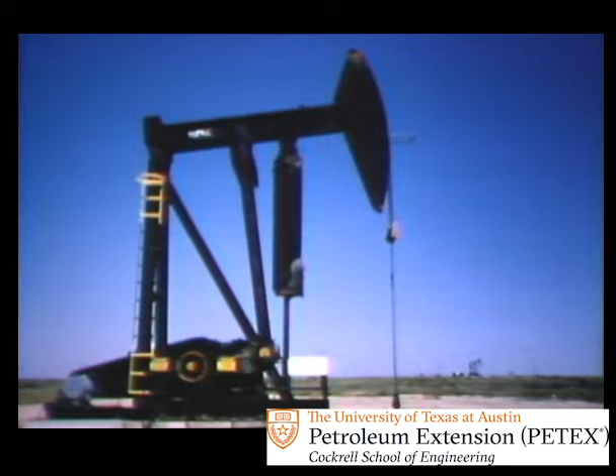The oil produced from this wellhead first travels to this treating facility, and then to this tank, where it's gathered and stored for shipment in the pipeline. But before the oil is ready for pipeline shipment, it must be tested for quality and measured for quantity. This testing and measuring process is the job of the gauger.

Although there are many steps in the gauger's routine, he has two goals to accomplish while working a lease tank. The first goal is to determine how much sediment and water, or S&W, is in the tank oil. S&W is very undesirable to have in oil, primarily because it is not a marketable product. Most leases produce at least some S&W, so the percentage of S&W contained in the tank oil is of vital importance to the lease company, the pipeline company, and hence the gauger.

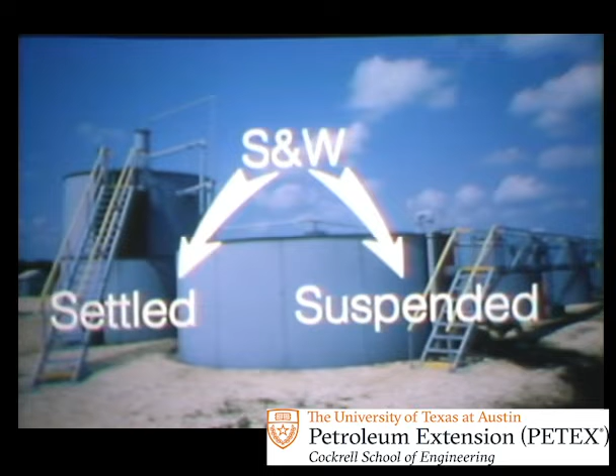We'll be talking a lot about S&W in this program, but for right now, all you need to know is what S&W stands for, and that there are two types of S&W: settled and suspended. Settled S&W forms a layer on the bottom of the tank and is often referred to as tank bottom. Suspended S&W remains trapped in the bulk of the tank oil and can only be seen after being chemically or physically separated from the oil.

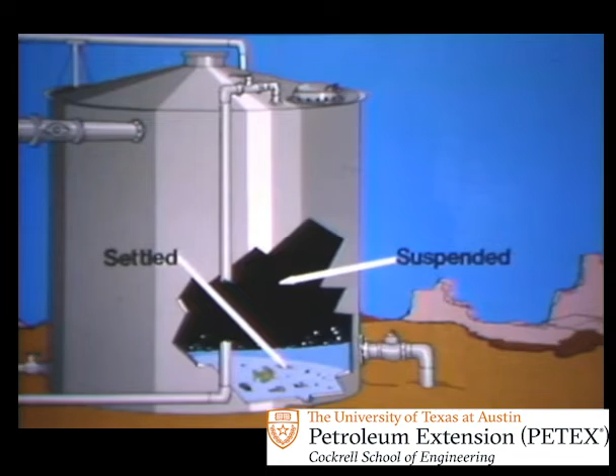The second major goal of the gauger is precise measurement of volume. He measures how much fluid is stored in the tank, transfers or runs almost all the tank into the pipeline, and then measures the remaining fluid in the tank.

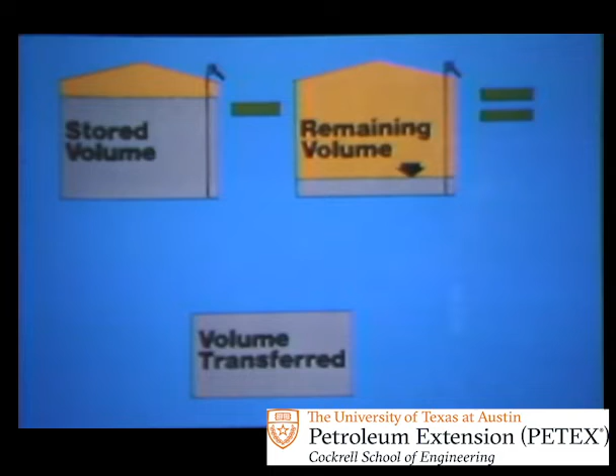So let's take a look at the tools a gauger uses to test and run a tank. And to start, specifically those used to determine the S&W content.

One of the first tools a gauger needs for S&W testing is a sampling device like this core thief. Most core thieves are the trap type, which means they have a rotating valve at the bottom that acts like a trap door.

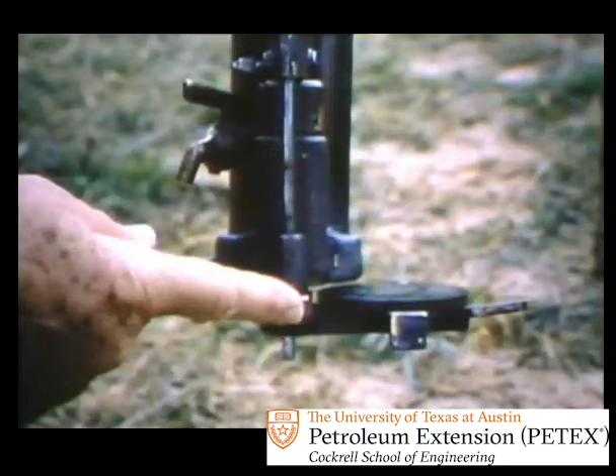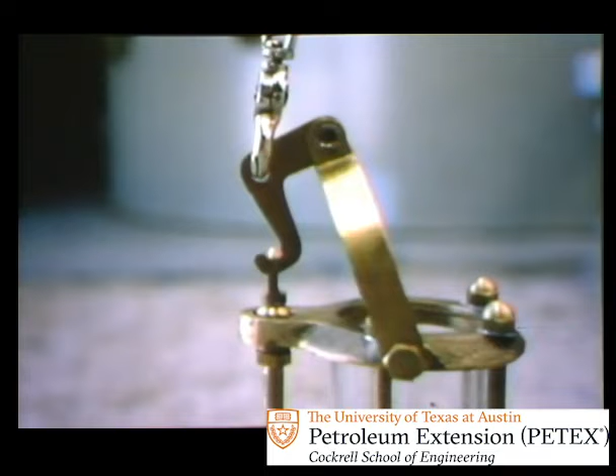First, open the rotating valve. This makes the thief a hollow tube that passes through the oil with a minimum of disturbance. The rotating valve can be closed at any depth in the oil by means of a trip release attached to the thief line. Once the thief is lowered to the correct depth, a sharp tug on the line will trip the valve closed. The thief is then retrieved with the oil sample enclosed.

Or, for tank bottom samples, the gauger can extend the trip rod on the bottom of the thief. When the trip rod bumps the tank bottom, the rotating valve closes.

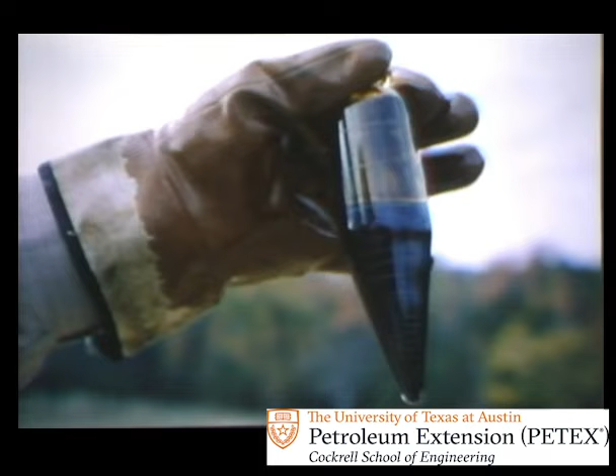Once all the oil samples are retrieved, the gauger will eventually put a small representative portion of the tank oil in a centrifuge tube for testing.

Centrifuge tubes are used to run the oil samples in a centrifuge. Tubes come in a variety of forms. There are 100 milliliter tubes, 200-part tubes, as well as 12.5 milliliter tubes and pear-shaped tubes. Regardless which is used, the tube should be clean and free of dirt and water.

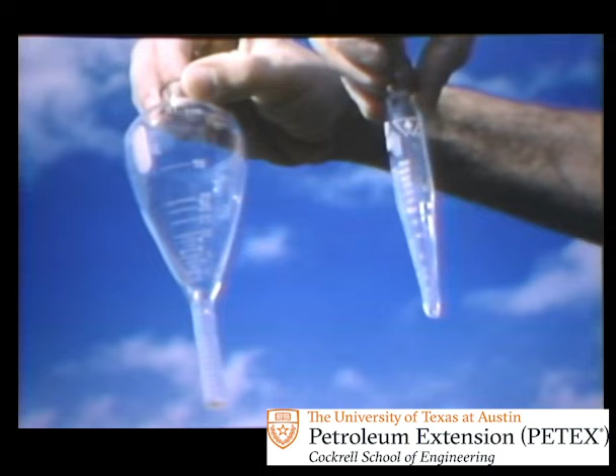The gauger dilutes the oil sample with solvent before it's tested. The solvent must be clean and water-saturated according to the API Manual of Petroleum Measurement Standards, Chapter 10, Section 4.

After dilution, the tube is placed in a preheating unit or the centrifuge preheater for warming, and a pocket thermometer verifies the sample has reached the proper test temperature.

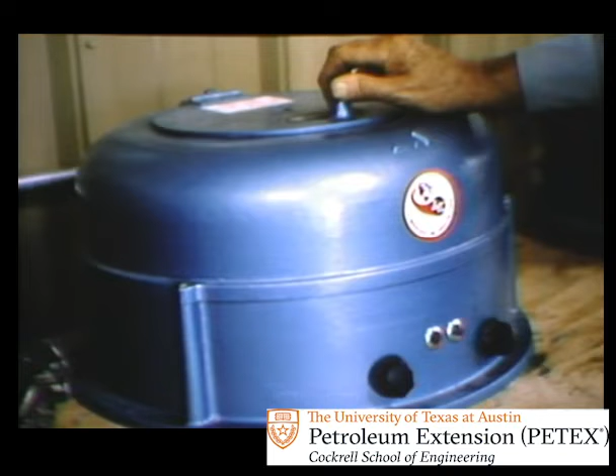Once the samples are heated, they're placed in the centrifuge. The suspended S&W in the oil is separated from the oil by applying centrifugal force. Since S&W is heavier than oil, any suspended S&W in the oil sample will be forced down to the tip of the tube.

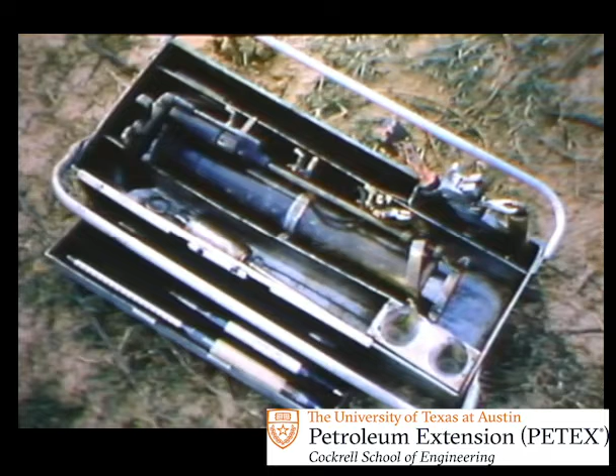Now let's look at the tools the gauger uses to measure volume. To start, he first determines the API gravity of the stored petroleum by using a hydrometer. Check the hydrometer for defects such as detached API gravity scales, mercury column separation in the thermometer, and loose shot in the tip.

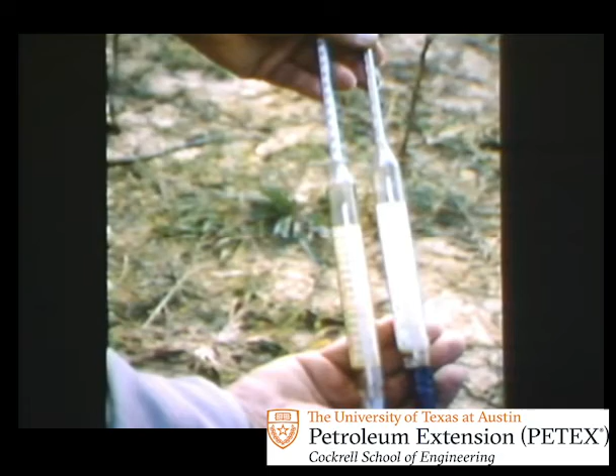Since temperature affects the volume of the stored petroleum, the gauger also needs a clean, approved cup case thermometer to lower into the tank oil.

To measure the depth of the oil stored in the tank, the gauger uses a flexible steel measuring tape graduated every 1/8 inch and fitted with a brass bob. The tape must be clean so the oil will leave a clean cut or mark on the tape for easy reading.

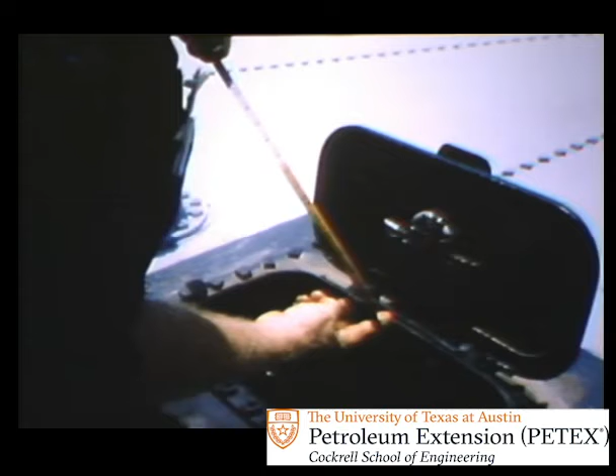In addition, the gauger carries a small notepad and pencil to notate his measurements and a rag to clean his hands and oil spillage.

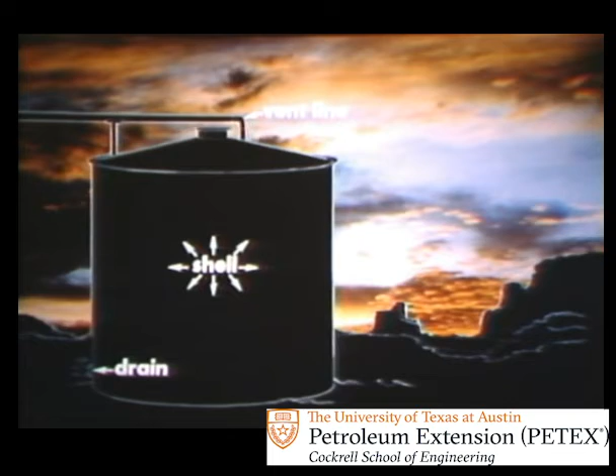Now that we've looked at the basic tools, let's look at the tank. The typical lease tank consists of a metal shell with a vent and drain, an inlet line to allow oil from the treating facility to flow into the tank for storage, a hatch through which the gauger measures and samples the oil, a pipeline connection or tank outlet line at the bottom of the tank, and often an equalizer line that connects and equalizes the liquid level of all the connected tanks in the battery.

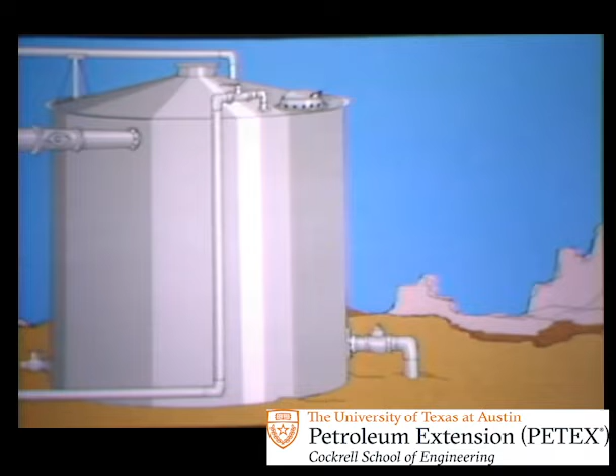Now that we've oriented ourselves to what we're going to be working on and with, let's walk through the gauging, testing, and running process step by step.

When you first arrive at the tank site, take time to inspect the general condition of the tank. Make note of any distortions, leaky seams, or connections. If there are any questionable conditions, play it safe. A gauger spends a lot of time alone, and it may be a long time before someone wanders by if you are injured.

As you walk around the tank, check that all bottom connected valves are closed, and that the tank outlet connection has remained closed and sealed since the last tank run. A seal is used for security purposes and is attached to the valve in such a way that any valve movement will break it. The seal itself is usually a numbered boxcar snap type seal, a numbered lead seal with a wire dart, or occasionally a padlock and chain.

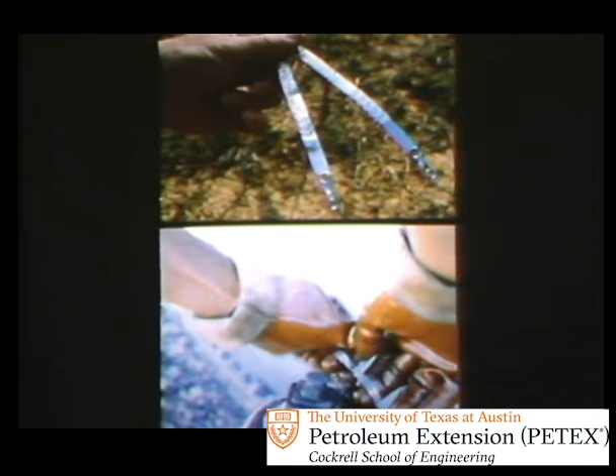Once the bottom valves are closed, write down the tank identification number and the maximum fill level, both of which are stenciled right on the side of the tank. Note the height of the outlet connection and of the equalizer line if one is in use.

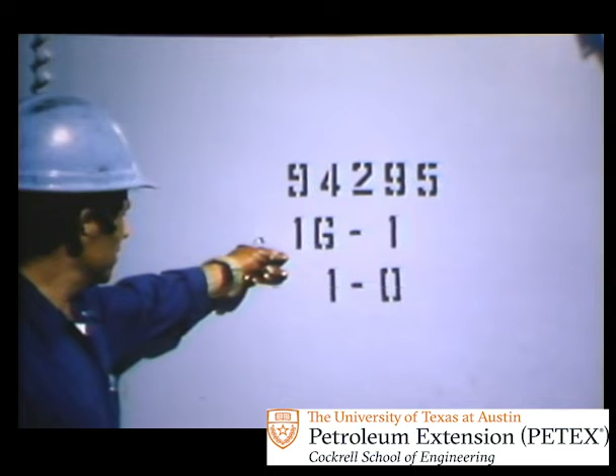Put all the tools in a carry case to save time, and before leaving the truck, switch on the centrifuge heater or preheating unit so it can be warming while you perform your other duties.

As you climb the tank steps, be sure to hold the handrail. This prevents falling on water or oil slick treads and bleeds off any static electricity which might ignite tank vapors when the hatch is opened.

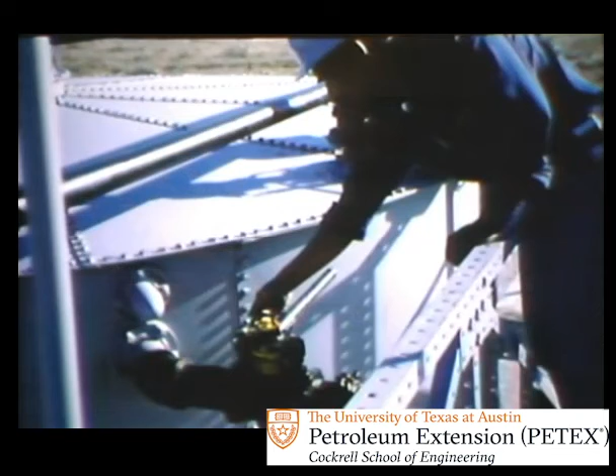Once on top of the tank, verify all top valves are closed, including the valve on the equalizer line. Once all the valves leading to and from the tank are closed, the tank is isolated and ready to work.

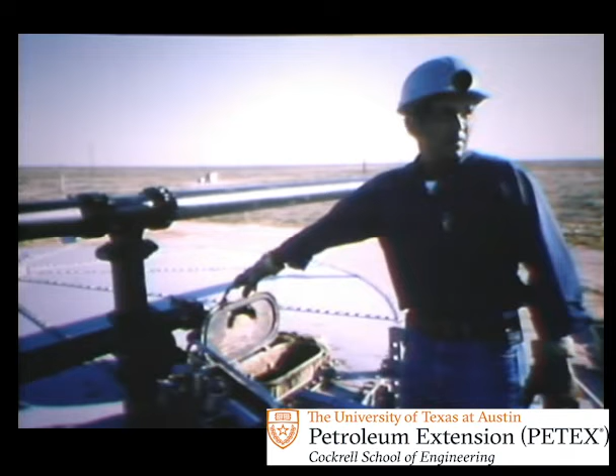If the tank contains sour crude, be sure you wear all the proper breathing equipment or take the necessary precautions. Place your body upwind and turn your face away as you open the hatch.

Next, look at the oil surface. If it's boiling or agitated, the chances are that the tank was recently filled or rolled. Do not work a tank in this condition. Agitated oil stirs up the settled S&W, giving inaccurate test results. Wait until the tank settles and the surface is still before working the tank.

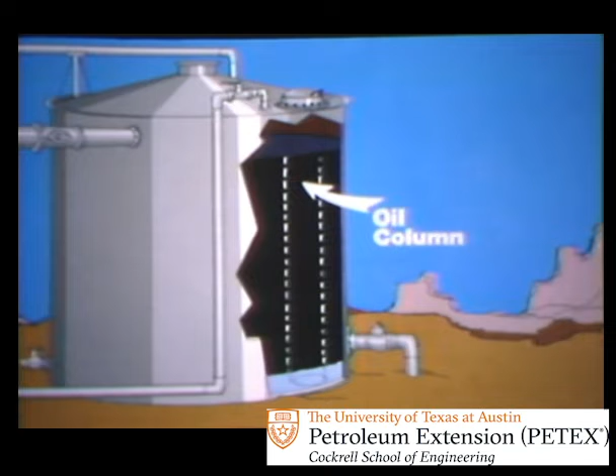Notice that the size of the hatch restricts access to only a small portion of the stored oil. The gauger is limited to working with a small column of oil. For this reason, the oil samples must be taken in a specific order, starting at the top of the oil column and working down. Otherwise, the movement of the thief stirs the settled S&W, contaminates the upper oil samples, and gives inaccurate test results.

First, take the oil thief and set the rotating valve to the open position and attach the trip. Lower the thief to the desired level, trip the rotating valve, and withdraw the thief from the tank.

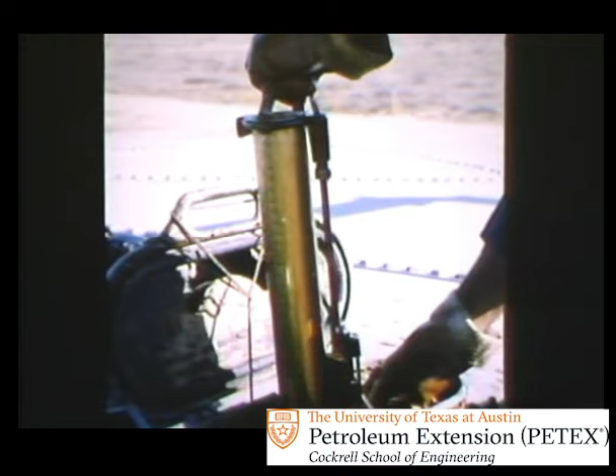According to the API Manual of Petroleum Measurement Standards, the level, as well as the number of samples, varies with the size of the tank. For tanks holding 1,000 barrels or less, only one sample is needed. Draw the sample midway between the surface of the oil and the bottom of the outlet connection.

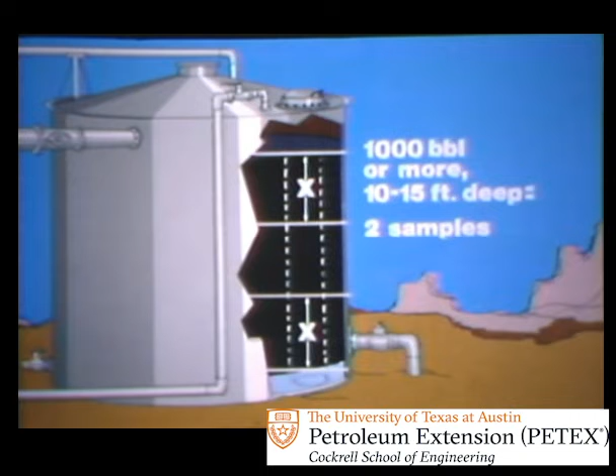For tanks holding 1,000 barrels or more, and having a depth of between 10 and 15 feet, a two-way sample is required. The upper sample is drawn at midpoint in the upper third of the tank content, and the lower sample is drawn at midpoint in the lower third of the tank content.

For tanks holding 1,000 barrels or more, and having a depth of 15 feet or more, a three-way sample is required. The top sample is taken with the top of the thief 6 inches below the surface of the oil. The middle sample is drawn at the tank contents midpoint, and the outlet sample is taken with the bottom of the thief level with the bottom of the outlet connection.

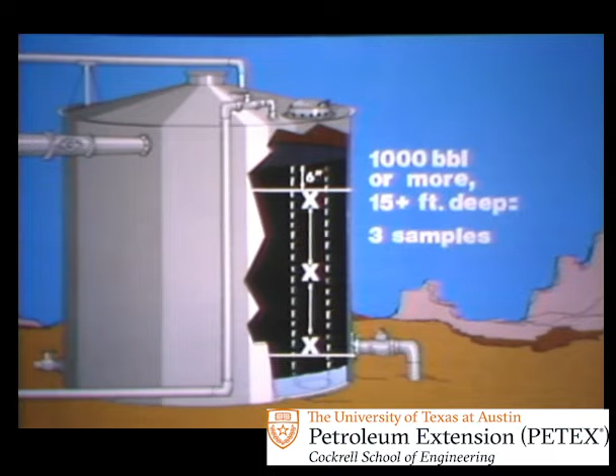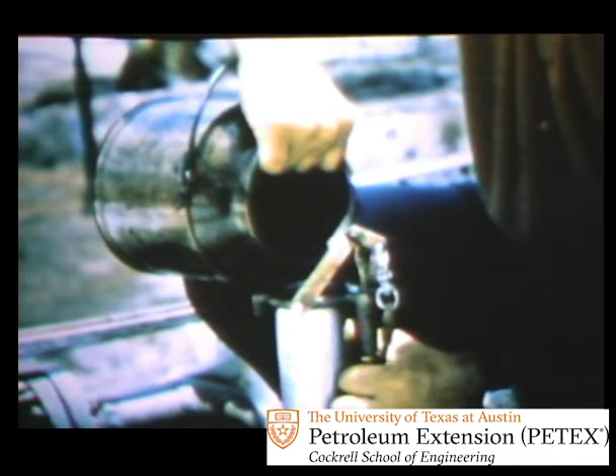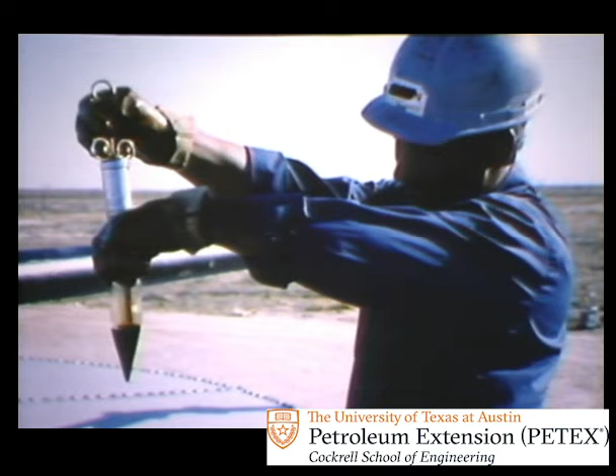As the samples are drawn in the proper order, the gauger may handle them in different ways, depending on company policy. One way is to collect all the samples in a sample container, mix the contents, then draw off a representative portion for testing. A second way is to draw off a small amount of each sample with a metal syringe and place it directly in the centrifuge tube until it is half full with samples of tank oil.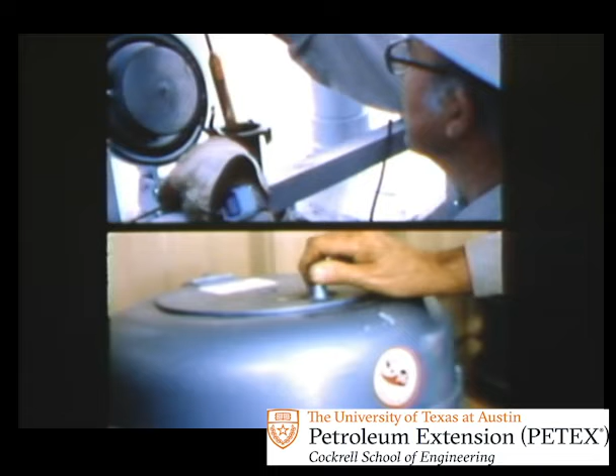Regardless of which method is used, a representative portion of tank oil must be used for both the hydrometer test and the centrifuge test.

Fill the thief with oil representative of the entire tank and place it in a vertical position. Then insert the hydrometer so that it floats freely throughout the hydrometer test. For high viscosity oils, a slight spin of the hydrometer will help bring it to rest.

Look at the oil surface around the hydrometer. If bubbles form, remove them with a piece of paper so they won't affect your reading.

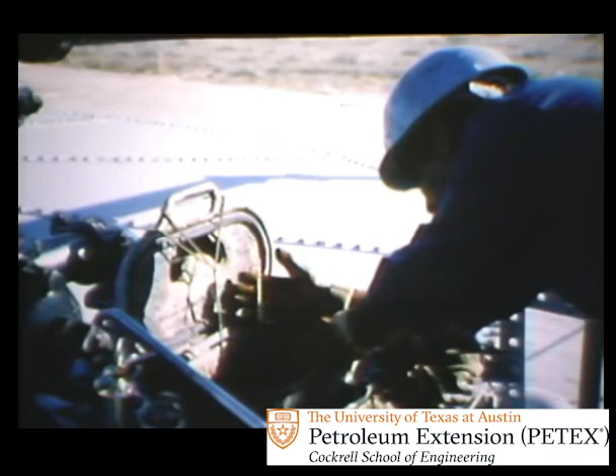Depress the free-floating hydrometer just 2 scale divisions and release. Do not depress more than 2 divisions, or the weight of the oil on the hydrometer stem will affect the reading. The hydrometer should immediately return to its previous position. If it doesn't, the oil is too thick to test and usually needs to be heated.

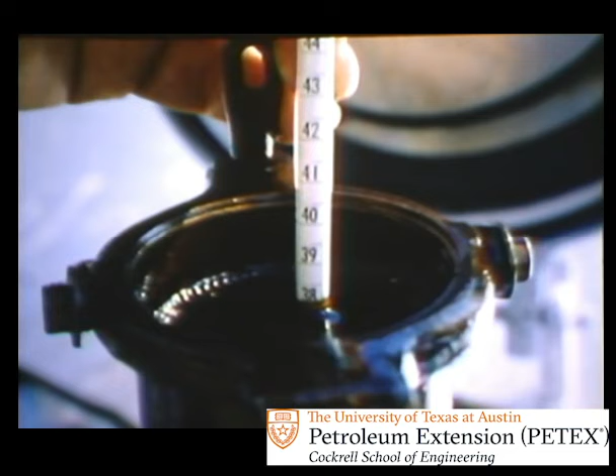The API Manual of Petroleum Measurement Standards, Chapter 9, Section 1, has a table listing limiting conditions and test temperatures for a variety of crude sample types.

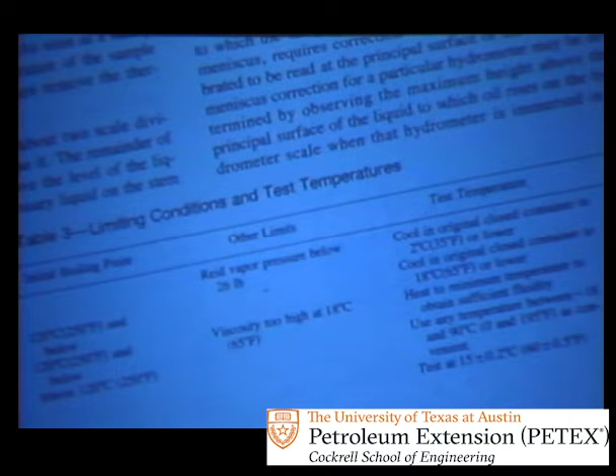Allow sufficient time for the hydrometer to come to rest, usually about 5 minutes, and for all the air bubbles to come to the surface. While you're waiting on the hydrometer, you can position the cup case thermometer for the tank oil temperature reading.

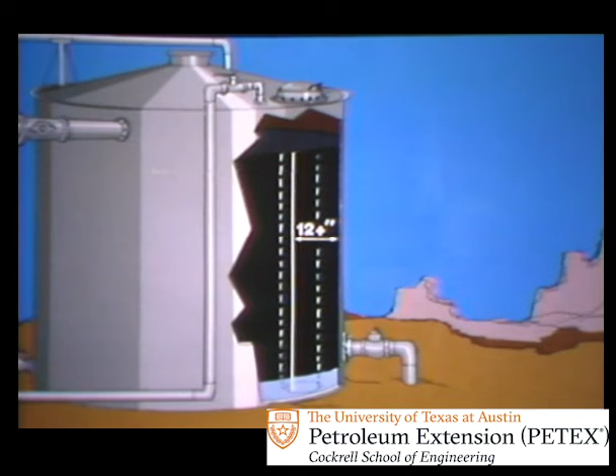Since the tank shell might be hotter or colder than the bulk of the oil, obtain your readings at least 12 inches or more from the shell.

Temperature readings, like sampling, depend on the size of the tank. According to API Petroleum Measurement Standards, if the oil level is less than 10 feet, or under 5,000 barrels, 1 temperature reading is sufficient. If the tank holds 5,000 barrels or more, and the level is between 10 and 15 feet, 2 readings are taken.

The first reading is taken 3 feet below the surface, the second 3 feet from the bottom of the tank.

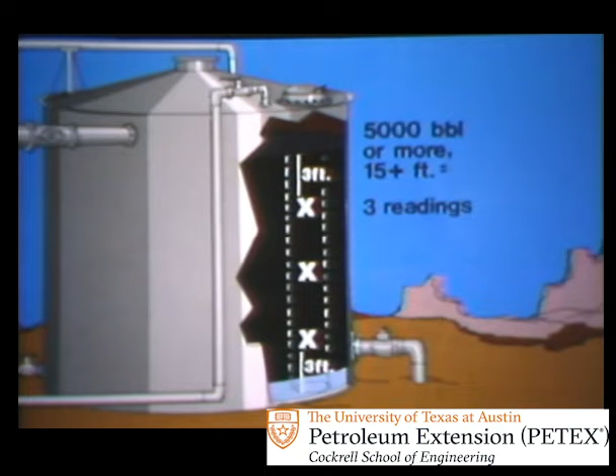If the tank holds 5,000 barrels or more, and the level is 15 feet or more, take 3 temperature readings. The first 3 feet below the surface, the second at midpoint, and the third 3 feet from the bottom.

Leave the thermometer at least 5 minutes for each reading. By the time the cup case thermometer is in place for the first reading, it should be time to check the hydrometer.

Shield the hydrometer from the wind and place your eye slightly above the plane of the oil surface. Notice that the oil creeps upward where it comes in contact with the hydrometer stem. This is called the meniscus and is caused by the surface tension of the oil.

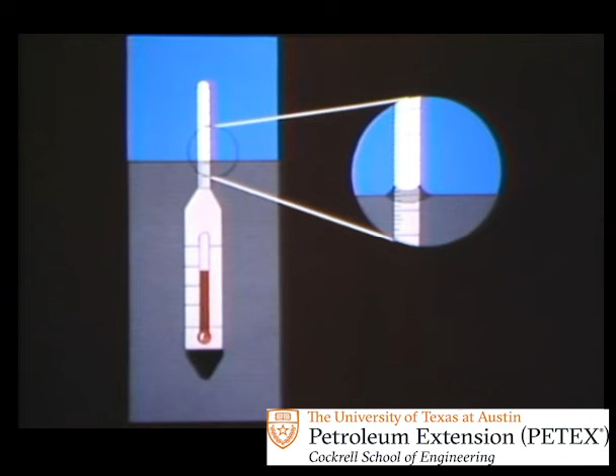Read the scale to the nearest tenth of a degree at the top of the meniscus, then subtract 1/10 of a degree. The remainder is recorded as the observed API gravity of the oil.

Now, withdraw the instrument just enough to expose the thermometer scale without letting the tip of the hydrometer leave the oil. Read and record the observed temperature to the nearest whole degree Fahrenheit.

The gauger's next step is to measure the tank's settled S&W. As crude oil sits in storage, water and sediment, which are heavier than the oil, will settle out and form a layer on the bottom of the tank.

Since this layer is mostly just trash, the gauger doesn't want to ship it as oil in the pipeline. So he measures the height of this layer and makes sure that the top of the settled S&W is at least 4 inches below the outlet connection.

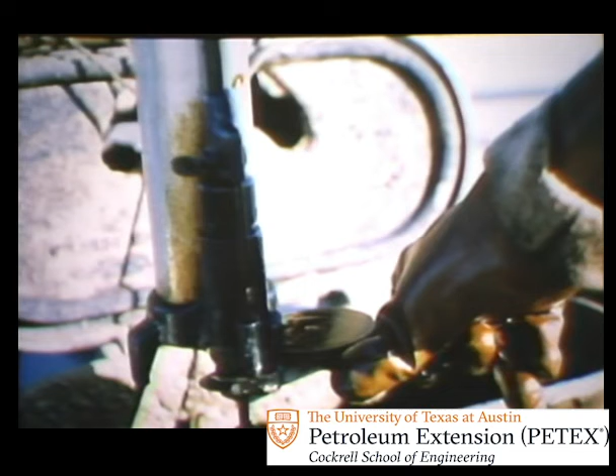There are several ways to test the height of the settled S&W. The first method is by using the thief. Begin by extending the trip rod if necessary and opening the rotating valve.

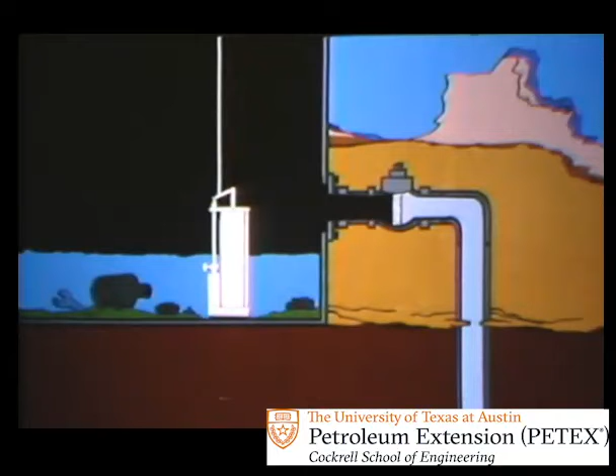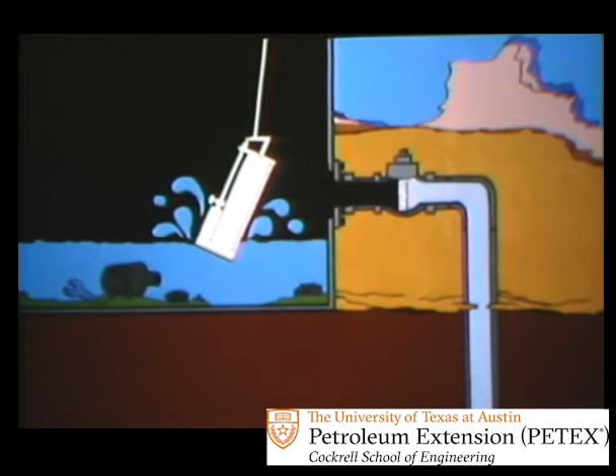Lower the thief slowly into the tank and allow it to rest on the bottom in vertical position. Raise it a little from the tank bottom and lower it with enough force to trip the rotating valve closed. However, do not drop the oil thief. Doing so might cause a splash on the bottom, which would give an erroneous reading. Take care not to tip the thief from its vertical position and keep the line taut.

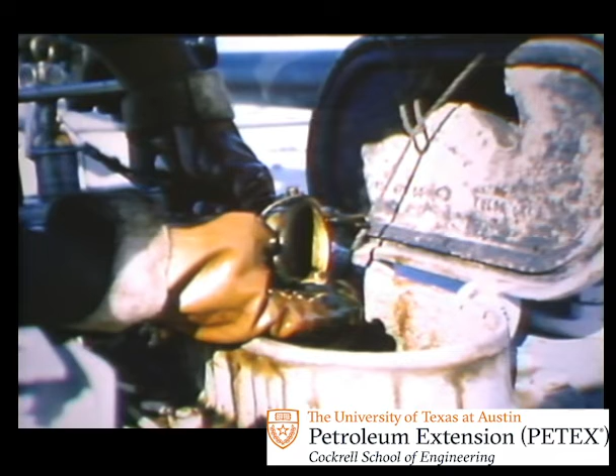Withdraw the thief and slowly pour its contents back into the tank until, by observation, feel, or both, it's evident that the remaining contents are tank bottom. Yellow streaks, change in oil color, and water globules indicate settled S&W.

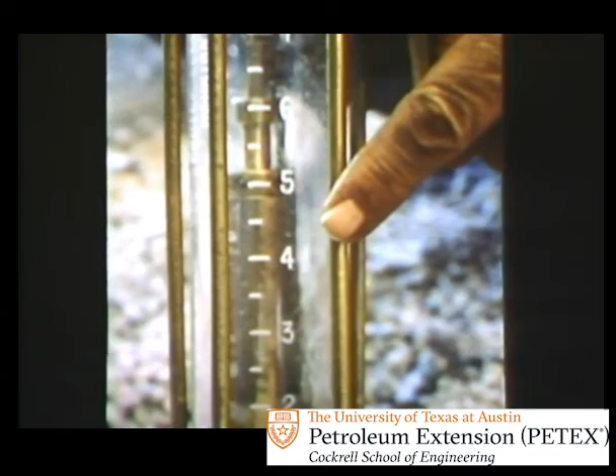Return the thief to an upright position and note the height of the remaining sample. If the trip rod was extended, that distance must be added to the sample height in the thief. The sum will be the height of the settled S&W in the tank.

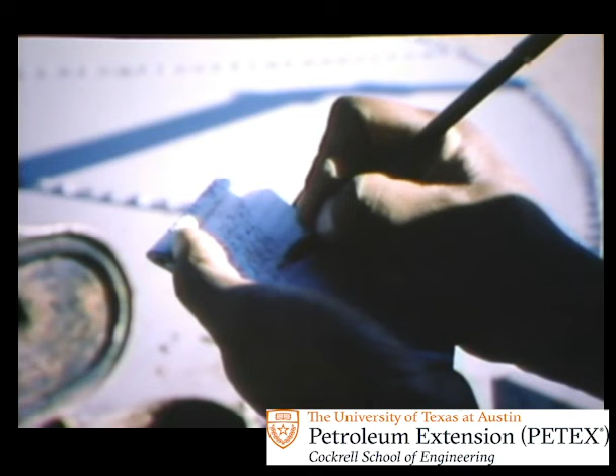Subtract the S&W level from the height of the outlet connection. If the difference is less than 4 inches, notify the operator to reduce the level of the settled S&W before running the tank.

The second method for determining settled S&W is the sample cock, located 4 inches below the outlet connection. Open and flush the cock. If good oil is observed, the clearance is adequate to run the tank.

The third method of determining the settled S&W is the use of water-cut paste. This paste is used in light-colored crudes of high gravity with settled bottoms composed mostly of free water.

Apply the paste to the lower portion of the gauge tape and bob. Once the bob is lowered into the tank, it takes at least 1 minute or longer for water to either dissolve or turn the paste red. Read and record the dissolved or red portion of the tape to the nearest 1/4 inch.

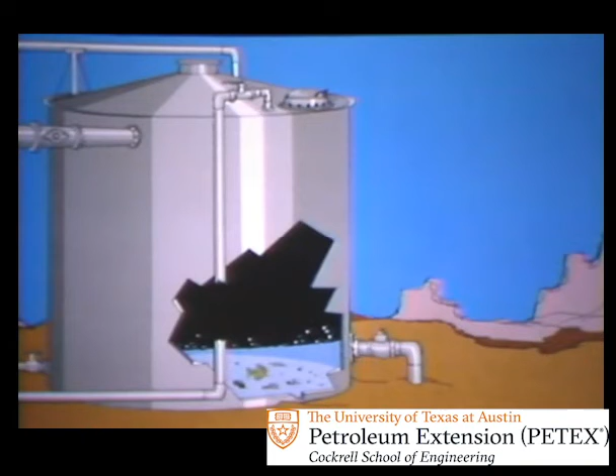Regardless of which method you use, considerable technique is required for measuring the settled S&W. In many cases, the true level is difficult to obtain, but the best determination must be made.

The gauger's next step is gauging, or measuring the oil height in the tank. For this, he again uses the steel measuring tape fitted with a brass bob.

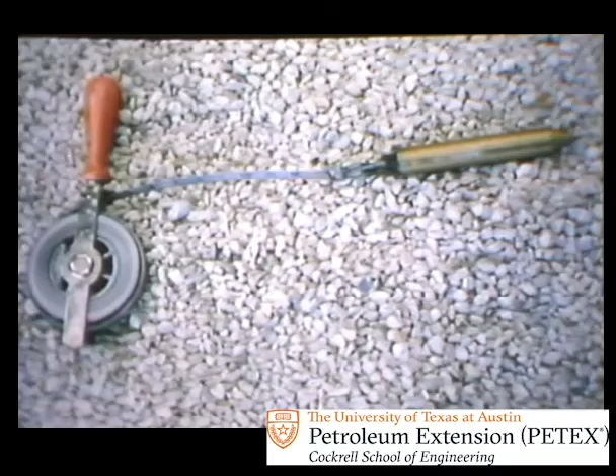Clean the tape to get a good reading, and for very light crudes, you may need to apply a thin coat of gauging paste in order to see the cut of the oil.

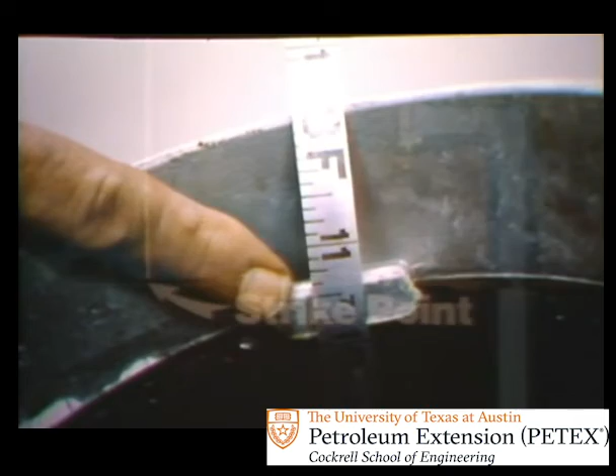Now, locate the gauge point on the hatch. It's usually indicated by a stencil, groove, or clip, and all measurements must be taken from this point. The bottom of the tank is not necessarily level or free from obstructions, and by using the gauge point, the bob strikes exactly the same place on the tank's bottom each time.

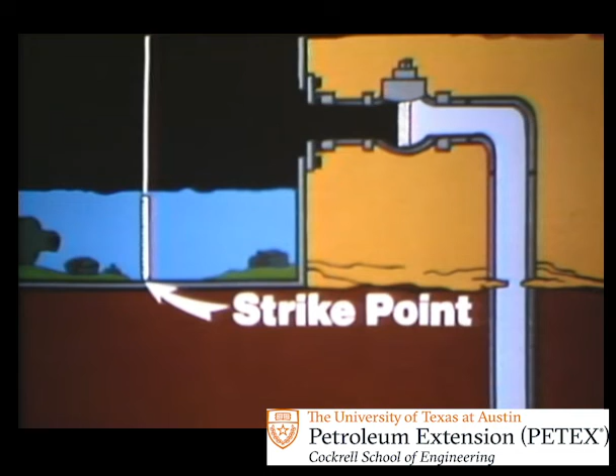When lowering the gauge line, keep the metal tape in contact with the hatch to prevent static electrical charges from accumulating and igniting the tank vapors.

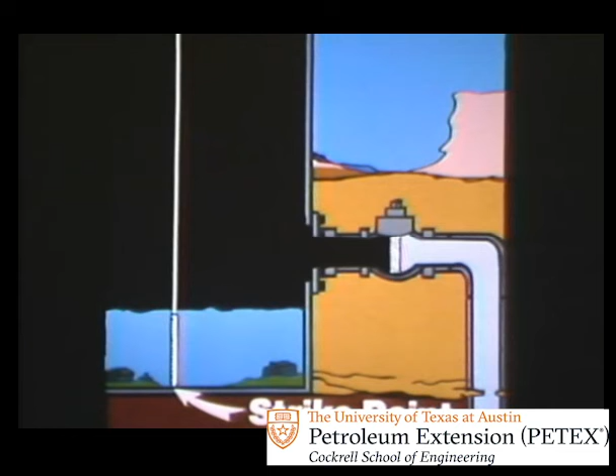Lower the bob carefully, and touch bottom so lightly that the bob does not deviate from the vertical position at any time.

Note the tape measurement where it strikes the hatch, and compare this to the gauge height stenciled on the tank. The two readings should be the same. If not, the bob may be resting on an obstruction.

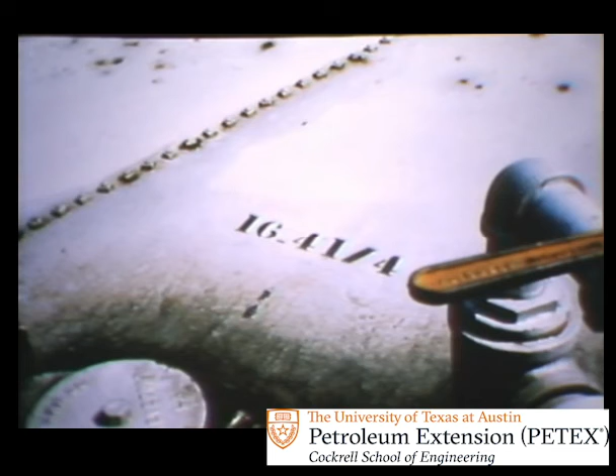Retrieve the tape and note where the oil level cut or marked the tape. Now, just to check your reading, gauge the tank again. Always gauge the tank twice to double-check the gauge reading. The readings from both gauges should be the same.

For tanks 1,000 barrels or smaller, report gauges to the nearest 1/4 inch. For tanks over 1,000 barrels, report gauges to the nearest 1/8 inch.

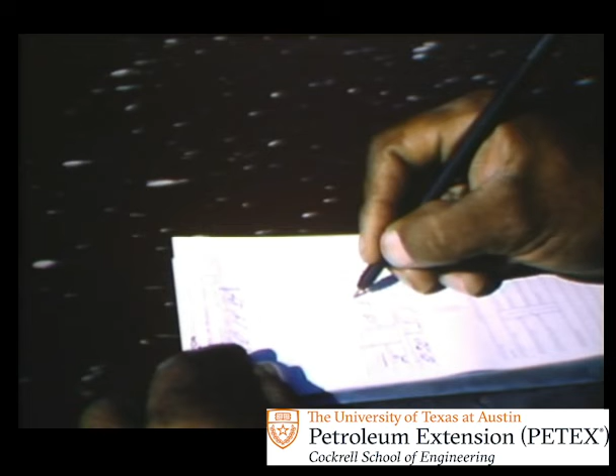This first gauge is recorded on the run ticket as the opening gauge. Later, after running the tank, it will be gauged again for the closing gauge.

Now, remember that tank thermometer? Retrieve it and read it as soon as it's pulled from the tank, without spilling oil from the cup. Read it to the nearest whole degree Fahrenheit, and then

repeat the process the required number of times for the tank size. For multiple readings, record the average of all the temperatures to the nearest whole degree.

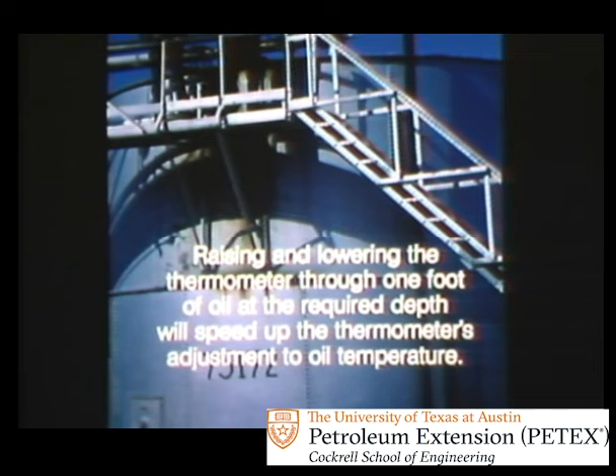In high viscosity oils, it takes longer for a stationary thermometer to reach oil temperature. Raising and lowering the thermometer through 1 foot of oil at the required depth will speed up the thermometer's adjustment to oil temperature.

Next, pick up all the equipment, clean the instruments, secure the hatch, wipe the tank of any spillage, and return to the truck with a representative tank oil sample to run the centrifuge test.

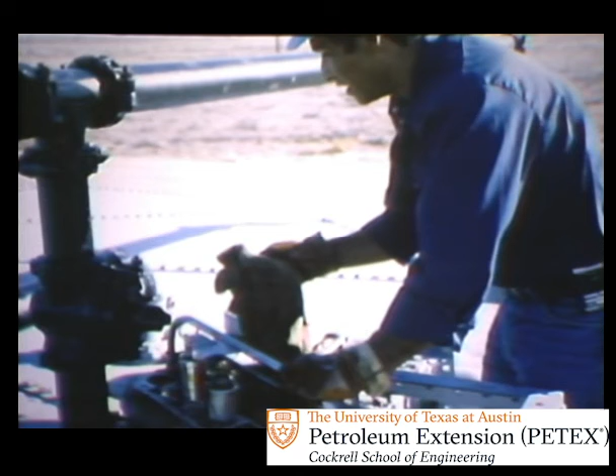By now, the preheater should be warm enough to test the oil for suspended S&W. Start with 2 clean centrifuge tubes filled to the 50 milliliter or 100 part mark with oil sample.

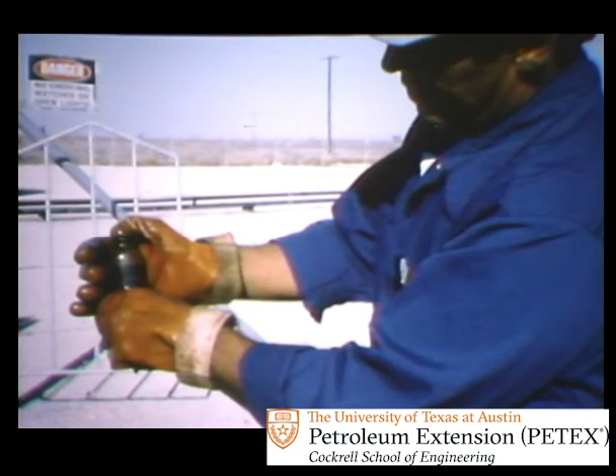Add an equal portion of solvent, then stopper the tubes and shake. Shaking the tube builds up pressure, so keep the tube well below face and eye level.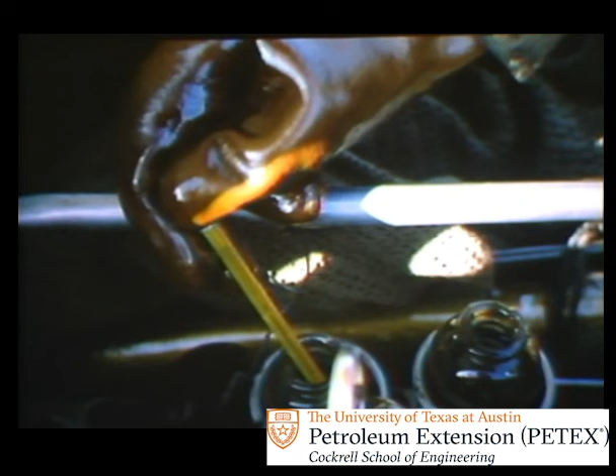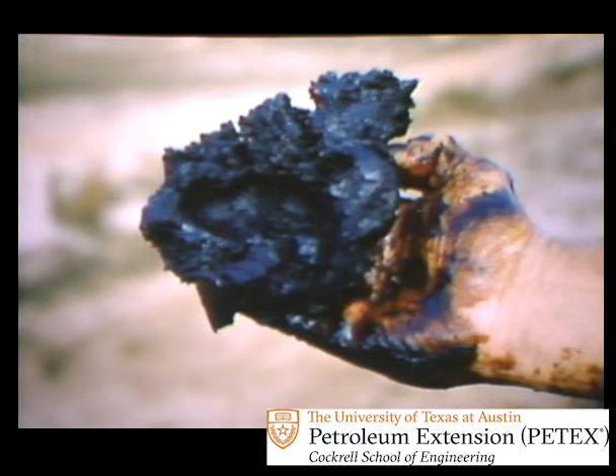Place the tubes in the preheater and warm to 120 degrees Fahrenheit, unless you're running samples of waxy crudes. Waxy crudes need to be heated to 140 degrees and cannot drop below 115 degrees during the centrifuge test. Otherwise, solidified wax will be forced to the bottom of the tube and will show incorrectly as S&W.

Also, certain crudes may need the addition of a demulsifier in order to separate the S&W.

Once the samples reach the required temperature, place one tube in the centrifuge. Then place the other filled tube opposite the first to act as a balance. Close and secure the centrifuge bowl lid and bring the centrifuge up to test speed. If the centrifuge sounds sluggish or slower than normal, check the speed for accuracy immediately.

The sample should revolve at a rate of 1500 RPM for 3 to 10 minutes, depending on the character of the sample.

At the end of the test, turn off the centrifuge and allow it to come to a stop all by itself. Do not squeeze the centrifuge hub for a braking action, because this practice often results in hand injury.

Remove the sample and read the volume of S&W in the bottom. Do so very carefully and do not agitate the contents.

Read and note the level of S&W. Then repeat the centrifuge process until two consecutive runs are made with the same levels. If this comparison becomes critical, refer to the API Manual of Petroleum Measurement Standards, Chapter 10, Section 4.

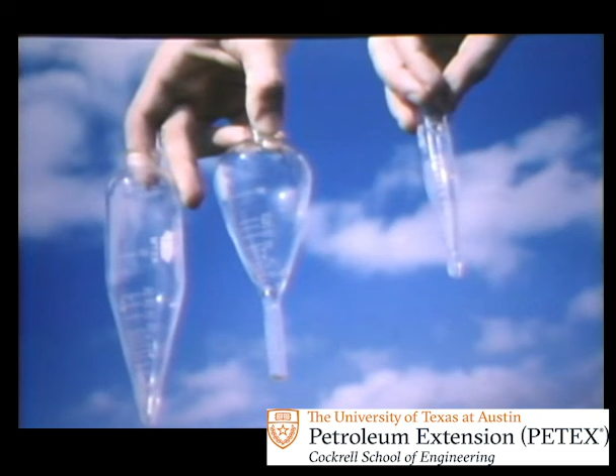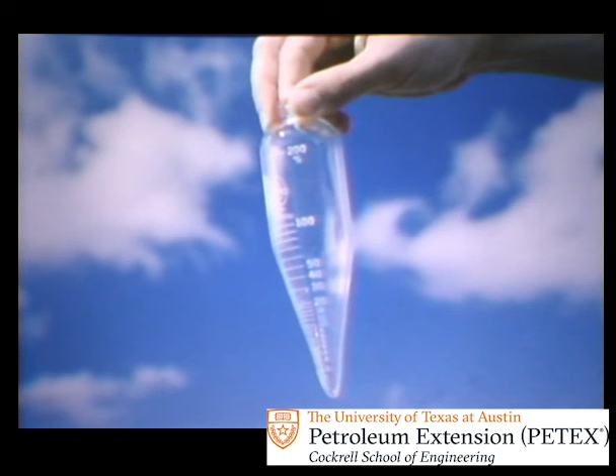If you are using 100 milliliter, 12.5 milliliter, or pear-shaped tubes, add the readings from the two tubes and enter the total on the run ticket as volume percentage. If you used 200-part tubes, read the tubes separately and average the readings, then enter the average as volume percentage.

Finally, dispose of all samples in a suitable container, clean the tubes immediately, and turn off the centrifuge heater.

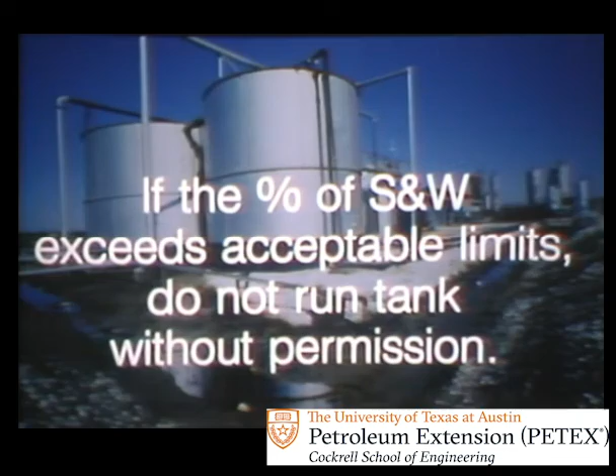Now compare the test results with the acceptable S&W limits set by the pipeline carrier. If the suspended S&W exceeds those limits, do not run the tank without permission. If the S&W percentage is within limits, the tank can be prepared for shipment in the pipeline.

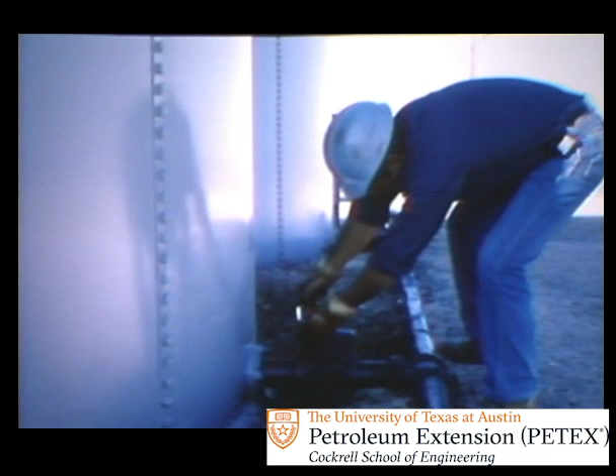To do this, check again that all tank connections are closed and sealed. When the tank is isolated, break the seal on the pipeline outlet connection and open the valve. The tank is now running. Record the broken seal number on the run ticket.

Often, recording broken and replacement outlet seal numbers is a state or federal regulation, but almost always it's a matter of record on the run ticket. Other seals may be entered on the gauger's seal record as well.

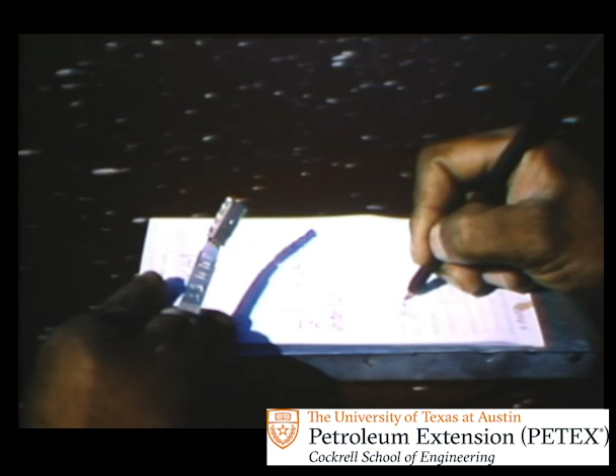After running the tank oil into the pipeline, the tank is considered out, or at low gauge. Close the pipeline outlet connection, seal it, and record the seal number.

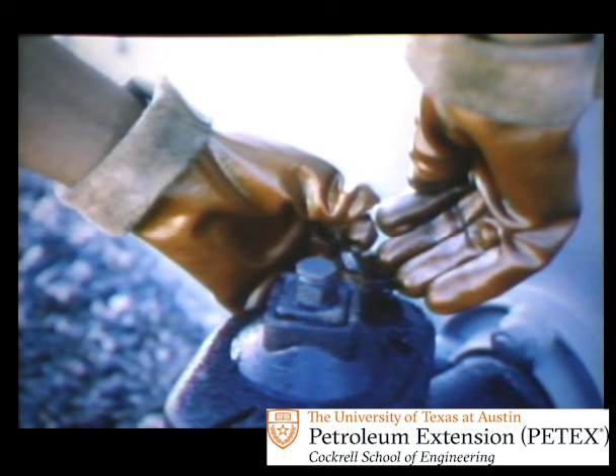Next, measure how much settled S&W is still in the tank, following the same procedure as before, and record your findings. Then measure how much fluid is left in the tank for the closing gauge, and enter this level on the run ticket.

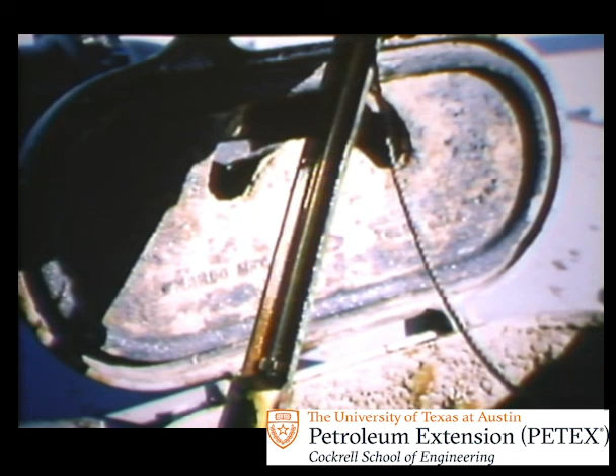Also, if the tank is larger than 1,000 barrels nominal capacity, obtain a closing tank temperature. In some cases, a closing temperature is required for smaller tanks, but you'll be notified of these special cases.

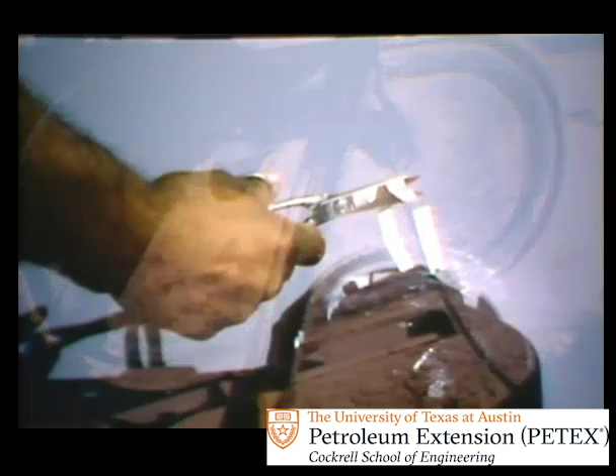Then prepare the tank to fill again by removing the seals or locks from the inlet valve and equalizer valve. Use tin snips to remove the seals, not a pocket knife.

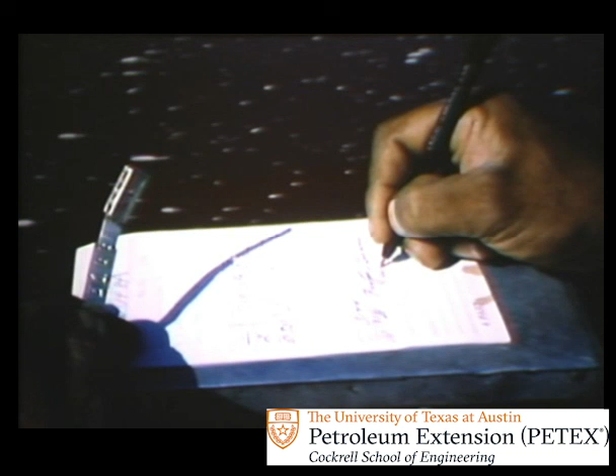Finally, check over the run ticket to make sure everything is filled in neatly and legibly. Some gaugers fill out the ticket as they go. Others make notes to be transferred later. It doesn't matter how you do it, as long as it's written down.

The run ticket affects company income, royalty payments, and allowables, so it's very important, and the figures should never be trusted to memory.

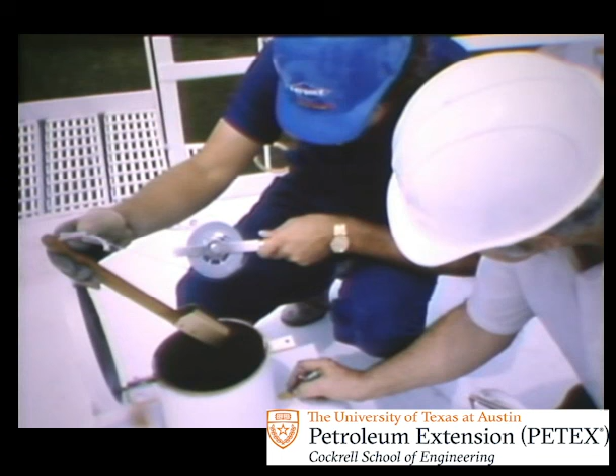Never sign a run ticket unless you have participated or witnessed the work performed. Likewise, never delegate your work to someone else.

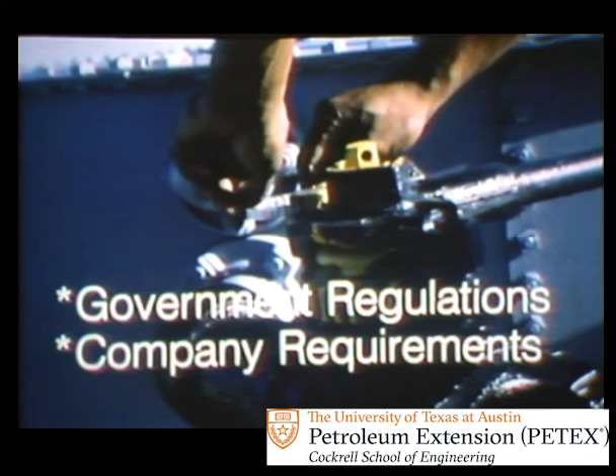In addition, comply with all government regulations and company requirements, and don't rush your work. Sacrifice speed for accuracy.

Now, the only thing left for you to do is to clean, check, and pack the equipment. Once that's done, you're through with this lease. Until next time.